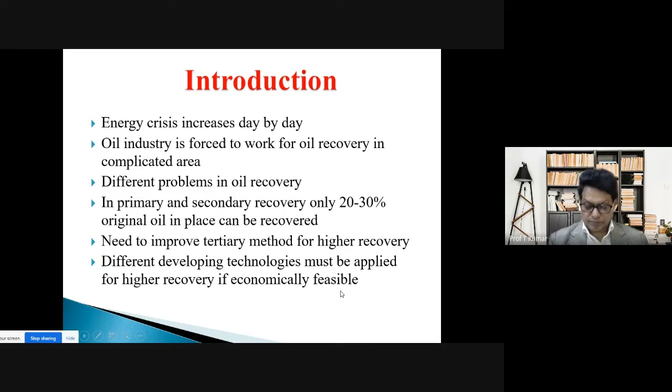Now, before we proceed to those, let's come back to this energy concept. What is the requirement of energy for our citizens? Ensuring lifeline energy to all its citizens at all times and at an affordable cost, leading to energy independence, is termed energy security. Now, in order to achieve energy security, multi-pronged action is required.

Some of the actions are direct, for example, use of the least energy to provide services with the available sources of energy. As a matter of practice, we should put effort into cutting any energy losses that happen in the entire energy chain system.

The third concept is that you don't really have to concentrate only on the major sources of energy. As a comprehensive approach, we should try to secure access to all forms of energy, no matter whether it is small or big. For example, bioenergy, or rural energy sources, bio-waste energy. These may be small sources, like biogas.

So energy security has become an important issue for a developing country like India. The strategic goals for energy independence by 2030 would thus call for a shift in the structure of energy sources from fossil fuel to renewable energy sources.

So stabilization is one aspect, done by the separation system, and then if any emulsion is there, using a heater-treater. The ultimate aim is to clear the oil of undesirable material through pre-processing until it is acceptable to the refining people. You store it and pump it to the refinery. Any excess gas that is not commercially usable could also be flared, called technical flaring, allowed only to a very limited extent these days. Eventually, this forms the complete system of the oil industry's operation for oil processing.

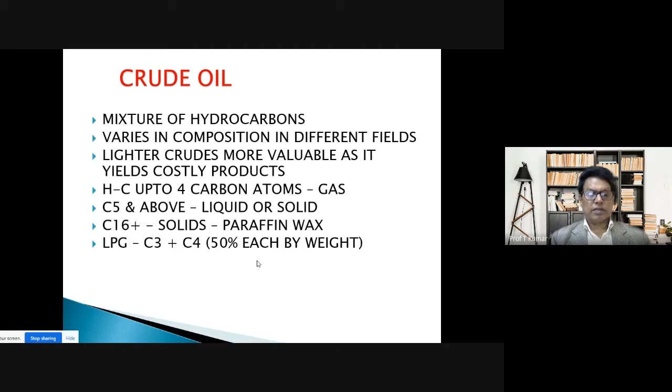Propane and butane, 50% each by weight, is known as liquefied petroleum gas, and we are all familiar with the household product LPG. Without that, our life is very difficult in the kitchen.

If you see the composition of a typical crude oil and gas, we have shown them separately. Crude oil composition is expressed in terms of percentage of carbon, 84 to 87%, which can vary plus or minus 10%. Hydrogen is 11 to 15%, sulfur 0.1 to 3.5%, these are called impurities. Nitrogen and oxygen are also present as impurities at 0.1 to 0.5%.

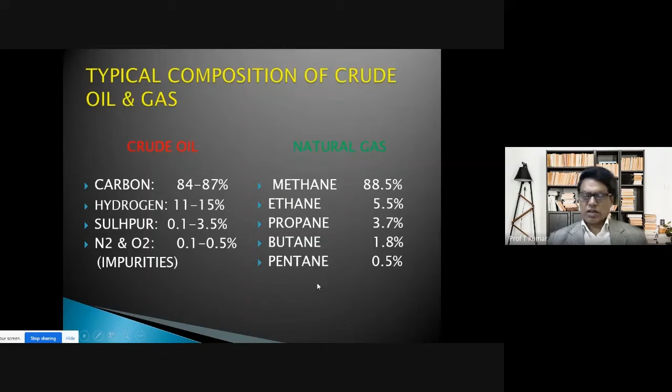Natural gas composition is expressed in terms of methane, ethane, and propane proportions. Methane content is very high, anything above 85-86%, shown here as about 88%. Ethane is in the range of 5.5%, plus or minus 10%. Propane is about 3.7%, butane 1.8%, and these two components go on to form the LPG composition. Pentane is about 0.5%, slightly less, and this is not a gas but a vapor generally present in natural gas.

So, what products are we familiar with from crude oil? There are two types of crude oils from the base point of view. On distillation, the residue is examined, and if it is primarily paraffin based, it is called paraffin-based crude; if the residue is asphaltene based, it is known as asphaltene-based crude, and it can also be a mixed base.

So typically in a refinery process, the first process is fractional distillation, which we already know from school days. It will yield petrol, diesel, kerosene, aviation gasoline, and fuel oil, which are heavier products—heavy oil, lube oil, wax, bitumen—all kinds of solid to gas to liquid to solid products which are sellable. By selling them, you make revenue and profit.

Whereas from natural gas also, valuable products are produced for selling, and this LPG we already talked about. Then from methane, we also produce fertilizer, particularly urea, and some petrochemicals like adhesives, which we use for day-to-day purposes, domestic as well as commercial. The furniture industry uses a lot of adhesives in commercial quantities, whereas at home we use small tubes of adhesive.

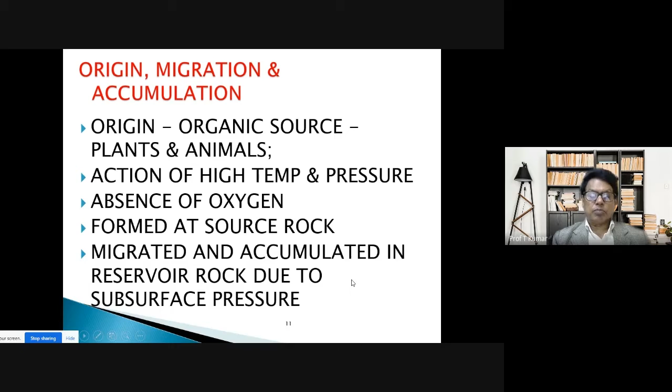Now, these micron sizes—to put it in common sense terms—you can think of a person's hair, man's or woman's. Hair thickness is a good example; the pore size will be of micron size, but typically the size could be similar to hair thickness.

And the hair is also of capillary type, not solid. So inside the hair, imagine there would be a hole. So that is the kind of range of capillary sizes in which oil and gas could be found. It's a very interesting challenge to petroleum engineers to locate this oil and produce it from the network of capillaries.

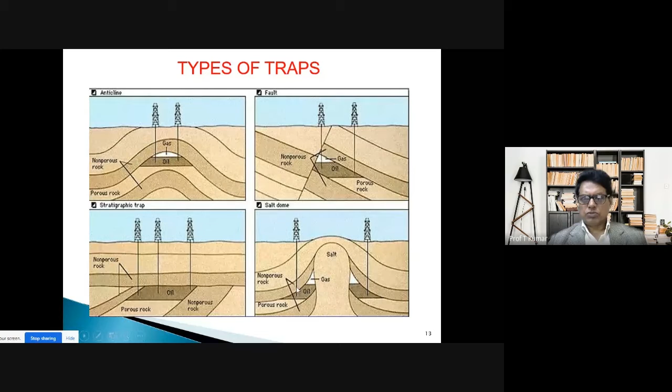Now again, people commonly talk about upstream and downstream - what is it, and is there a midstream also? Well, initially when the industry was formed, there was no concept like midstream. The company used to explore and produce oil and gas, and then sell it to refineries.

So the entire job of making it ready for selling was done by upstream industries, including transportation if needed, or it was a partnership between the receiving organization like refineries or petrochemical industries who would buy your oil or gas. But these days, because the industry has expanded so much, transportation and pre-processing and extraction of valuable products have become very big businesses.

This is particularly true when it involves a larger context - many continents are involved, many countries help us get gas mostly, and oil can also come from neighboring countries. So when that business is so large that exploration companies are not burdened with supplying these to refineries directly,

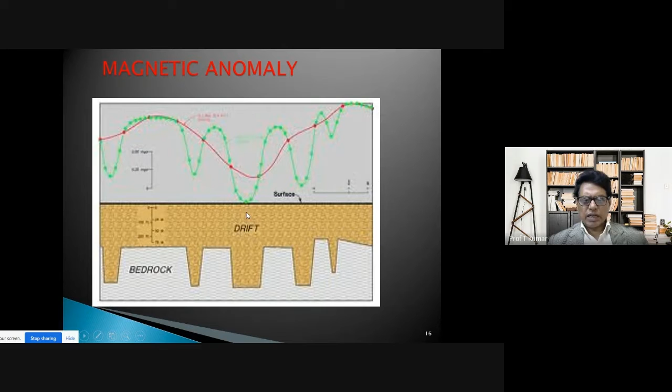This is an example of magnetic anomaly where it is lab data only. You can see the two types of rocks, and if you take the average vertically or volume-wise, it will have a reflection at the surface of the magnetic property, provided one of the two beds has magnetic property like iron ore or something like that.

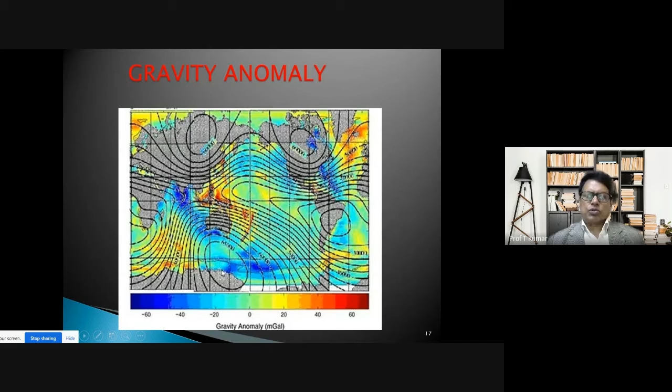But gravity is a very common thing. The acceleration due to gravity, from school days we studied as g, varies from place to place because the force of attraction toward the center of Earth depends on the total mass of the rock, which has varying density. So the resultant effect on the value of g will be different at different places. You go to the Himalayas, it will be different. You go to any plains, it will be different. So it depends on the total density of the rock below, up to which you want to see. This is another property which is used simultaneously.

Okay, these are only backgrounds. There is no objective here to teach geophysical methods.

And if it is all successful, we say we have got a discovery. So we declare it as a discovery of the property.

After that, a more systematic approach is done to drill more wells in the whole property so that the production in the long run becomes commercial. This activity is known as development. So you have appraisal and commercial production during this stage, and it expands in a more systematic, scientific manner in the development of the field, creating all kinds of infrastructure, not only wells but also pipelines, a network of pipelines. And I gave you one slide where the entire surface facility like separator, heater treater, treatment facilities, sand treatment, and fines treatment exists. Ultimately you have to have clean oil and gas going out. Even gas is also treated to some extent.

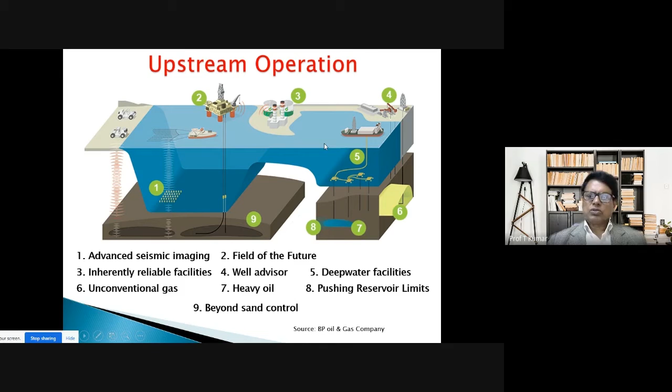Management and information: how to manage the whole operation, because it is a commercial venture, not a scientific experiment in the field. The ultimate objective is to produce the mineral property, oil and gas in our case, and profitably. The flow of information should be such that managing this entire exploration, production and processing industry has minimum expenditure and maximum profit.

Increasing the production of liquid fuels is another kind of decision, because it is a mixture of hydrocarbon that also contains gas in dissolved and free form. As a reservoir engineer, the job is to plan the whole thing so that production is optimized in terms of maximum liquid production. If you sell oil and gas and some gas remains dissolved in oil sold as oil, that is profitable. But if liquid vapor goes into gas and is sold in gas form, you lose valuable revenue, because that vapor, if produced as liquid, would have fetched more money. These are the optimization problems, a very good engineering approach petroleum engineers use.

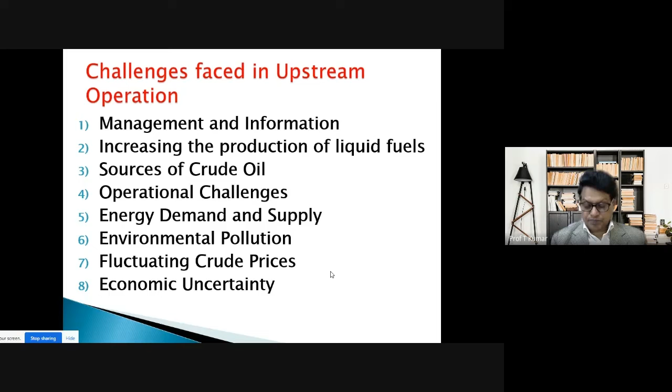So you have to conquer water before going below sea level to find oil and gas. Conquering water means for exploration, production, transportation, maintenance, and the logistics service system. The entire chain of oilfield operation will be influenced by whether water depth is more or less. If it's nearer the shore, a structure like a platform could be anchored nicely, or it can sometimes be a jack-up platform. There are also semi-submersibles and ships. So the cost of operation per barrel of oil is much higher if you have to handle exploration and production offshore with more water depth.

I used to summarize the whole thing in two words. This challenge will be called the challenge of water depth. More water depth means more challenge to conquer that water for any operation.

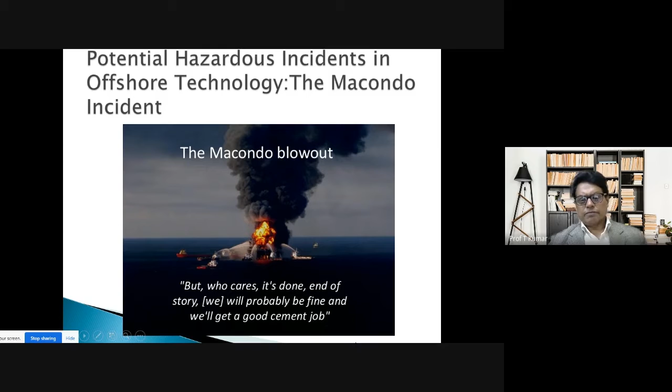And then hazards, which are sometimes very, very deadly. An example is a blowout - you hear about blowouts sometimes. Whether offshore or onshore, a blowout can cause devastating effects, not only burning entire platforms, but if there's no time given before the emergency occurs, people's lives are also endangered. This has happened many times. One such example is the Macondo incident where a blowout occurred. There are many other examples, but the purpose is not to show many of them.

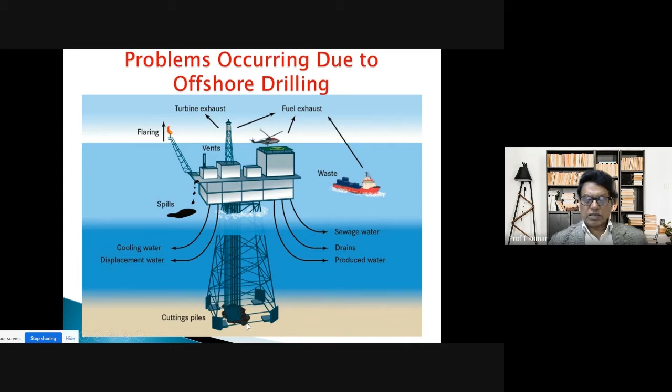In offshore drilling, there are problems related to the drilling structure and drilling platform. You can see that space is the biggest constraint - from one platform, you have to drill many wells. The source of water available is all seawater. People living there have to sustain a high cost of living, and transportation is also only through helicopters. You can't think of traveling by ship - it would take one month to travel 100 or 200 kilometers. So the cost of offshore drilling operations, besides operational hazards and operational expertise like the number of wells drilled through a single operation, and piling operations to make wells stable - all these are shown in this diagram.

In summary, the problems occurring due to offshore drilling are that the environment around the drilling site is bombarded by toxic chemicals and threatened by accidental leaks and spills. Primary environmental concerns associated with drilling sites are drilling waste, muds, cuttings, drilling fluids, produced water, accidental leaks, blowouts, and accidental or intentional spills. Drilling waste such as drilling muds, if thrown into the sea, cuttings, or onshore as well, and produced water contain both abundant and diverse contaminants. These are basically offshore operations, but some of them are also common onshore. So environmental challenges and meeting them as per environmental regulations is an additional challenge.

These risks include wildlife developmental defects, shortened lifespan, and physiological challenges. The life that exists in the sea should not be adversely affected. The potential for accidental or routine release of drilling wastes can occur through containment failure, runoff, or direct discharge. Many of the toxic chemicals associated with oil and gas drilling are known to accumulate and magnify in the food chain. This poses a risk to aquatic organisms higher in the food chain, such as fish and birds. Natural gas and oil leaks and spills can have extremely negative effects on the natural environment, both onshore and offshore.

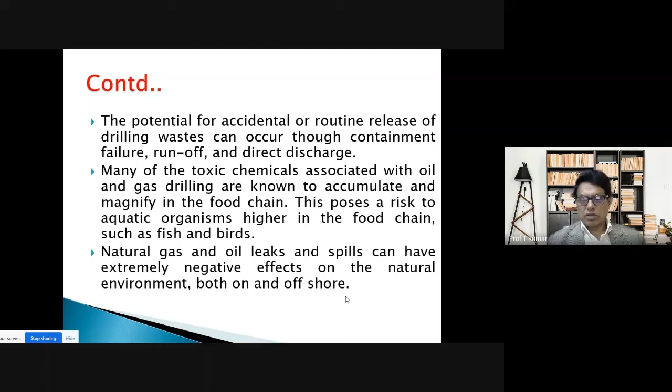Drilling fluid management on the site has certain responsibilities like proper mud mixing, mud circulation and transfer, bulk storage and transportation, solid control, high pressure manifolds and well control, cuttings re-injection and systems.

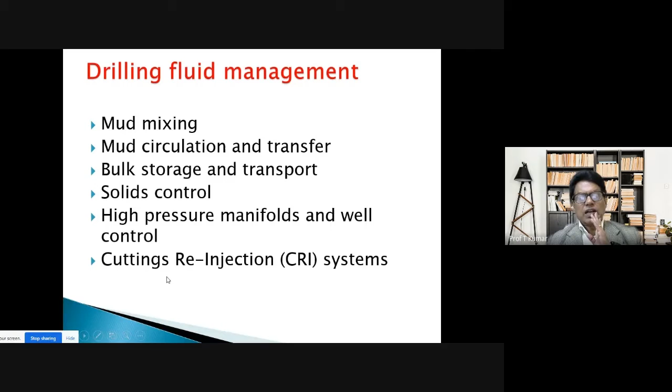Environmental Protection Agency studies show that routine discharge of any drilling mud can adversely impact bottom-dwelling species. These impacts range from burial of species to disruption of basic life such as reproduction, eating patterns, and lifespan. Toxic discharges from drilling mud may also lead to acute or immediate evident effects in some representative marine species such

as scallop, lobster, and a variety of fish. This is only an example. So these are the drilling operations that have been shown here.

Now, drilling challenges are just named here, we are not discussing much on drilling. These are percussion or cable tool, rotary drilling, hole cleaning by mud, incline or horizontal wells, use of turbo dyna drills, drag, cone or diamond bits, temperature, pressure and water depths, and drilling for presence of hydrocarbon. Depending on the type of rock, we have three different types of drill bits: for hard rocks, for medium hard, and for soft rocks, drag bits.

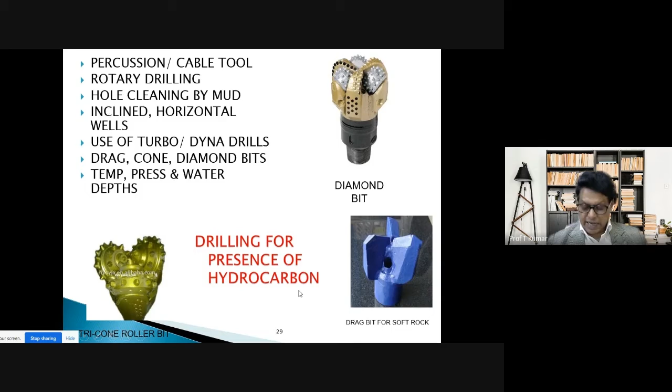In offshore drilling, of course, these are the structures we are having. Platforms like jackup, semi-submersible, drill ships, three different types.

Challenges are water depth, hostile environment, current, wave, and these are the corrosion problems. And the wind, wind can also have an effect.

Dynamic positioning of vessels, which are ship type, has to be maintained while you're drilling or doing other operations. This requires a special type of vessel. And logistics, of course, transportation of the men and material.

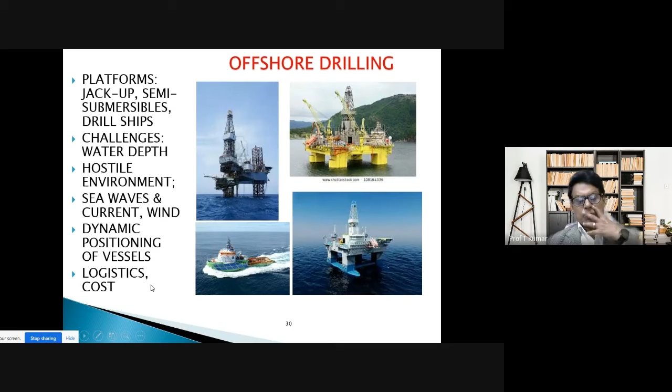Artificial lift, pumping wells like SRP, ESP, hydraulic, gas lift, plunger, chamber, EOR, IOR, water, polymer, surfactant, caustic, thermal. So these are a combination of all that at different stages of life.

These are there. Like here, sucker rod pumping example has been shown, ESP has been shown, polymer flooding in enhanced oil recovery has been shown, involving two wells, production well, injection well, and any chemical EOR where surfactant, polymer, or any alkaline or foam or these are used.

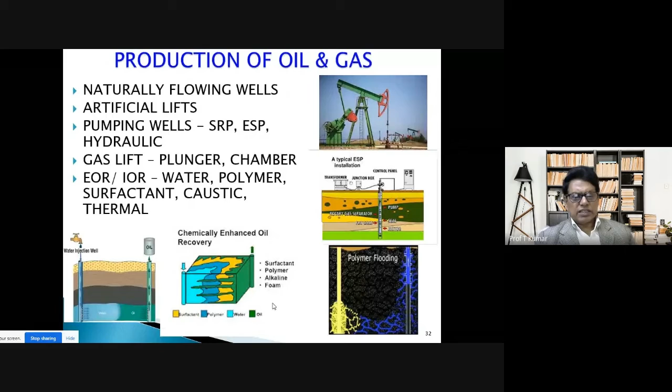So this is a typical water injection. So that part we have finished as far as production is concerned.

Then some associated sources are there. For example, people say, what will happen after 50 years? Will all oil and gas be exhausted? What will happen to our young engineers? People say, okay, you have to switch over from conventional sources of oil and gas reservoirs to unconventional sources of oil. One of the most important unconventional sources of gas is known as natural gas hydrate.

Natural gas hydrate was known for ages. In fact, it was known from the time the oil industry started, because hydrates used to cause problems in the gas pipeline when the pipeline faced low temperatures, particularly minus temperatures. Part of the gas pipeline used to get choked. So that was a nuisance.

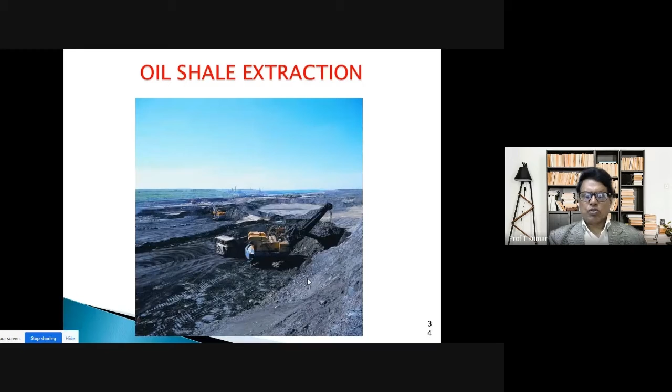Another source of energy yet to be tapped fully is found to some extent in certain parts of the world, particularly in Canada. It has been found that oil sand has actually been mined. So it's not impossible, you could mine it, and the solid hydrocarbon, which cannot be produced by conventional approach, can then be extracted in a large scale retort. So by retort, you could now extract it.

So mankind has been able to do all kinds of things which will ultimately make the energy available to you. And very common already in practice now is what is known as shale gas.

Shale gas will mean gas contained in shale rock. Shale rock is also considered to be the source rock in which the hydrocarbon was originally deposited, but because of the low porosity and permeability, it did not travel a long distance. So it got trapped, and with time, natural fractures also developed because of the way the entire shale material got consolidated later on.

There is an in situ stress change that has happened - the geologists will tell you more. The stress changes took place over millions of years while consolidating the rock, with a change in pressure and temperature. It developed the natural fractures.

So they say that in the natural fractures, in the crevices, in the pores, the gases are there. The pores are there, it is porous material. This shale rock was originally formed from fines or fine sands, much finer than sandstone sand size.

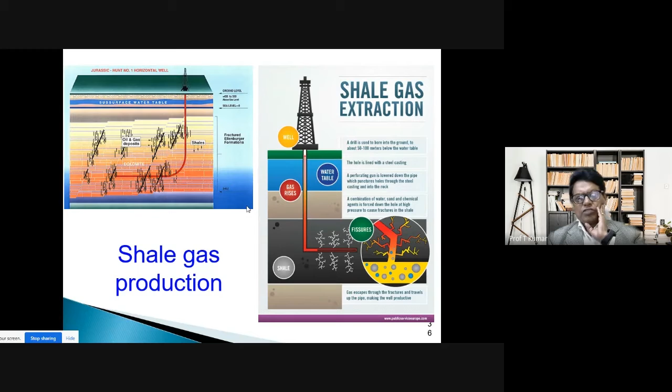it is a very important source of energy supply in the United States. And in India, of course, we are not in a very mature stage, but we are in an initial stage. Some places the work has started.

So this is sand material and shale material with oil - slightly different, but operationally it is non-movable hydrocarbon oil, heavy oil, viscous oil contained either in the sand or in the shale form.

So these are the unconventional sources of hydrocarbon. For now, there is only limited extraction going on, but in future, wherever such types of deposits will be there, it may become a good source of hydrocarbon for people.

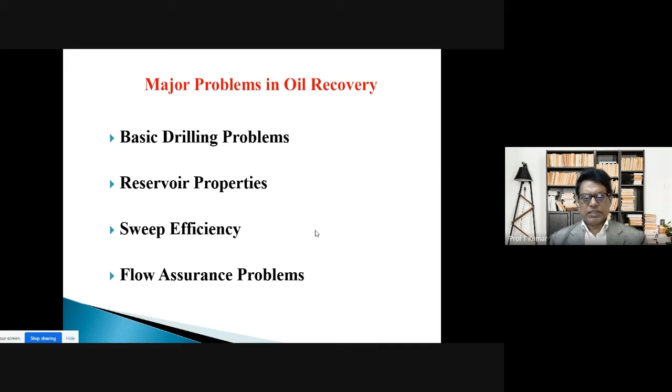So I have now quickly gone into more operational aspects, and I divided it into basic drilling problems, reservoir properties, sweep efficiencies, and flow assurance problems. This will highlight things more operationally.

So flow assurance, a word you have heard, is of recent origin, last 15-20 years. Initially, people thought of individual problems, but basically, oil and gas wells, when producing, should be producing without any hindrance. That's why it is known as flow assurance - you give assurance to remove hindrance of production into the wellbore.

This hindrance can be of many types. It can be corrosion products, it can be paraffin, it can be wax of any type, and it can be scales - maybe solid deposited around the wellbore. So all kinds of formation damage related problems, and the well tubing problem - the tubing getting choked - all that together we can call the flow assurance subject. So you have to solve this problem.

So wax, asphaltene, inorganic scale, sand, or a mixture of these. Sudden formation of hydrate in a gas well can also be part of it due to low temperature. As I was telling, in the initial stages of the industry this was a major problem, and now they have resolved that. Lack of reservoir pressure required to move hydrocarbon to the receiving facilities. Increased pressure drop caused by high viscosity emulsions, so emulsion problems between oil and water. If it is enormous in the well itself, then this is also part of flow assurance. Restart difficulties due to heavy and viscous oils. Corrosion problem due to presence of acidic environment and hydrogen sulfide.

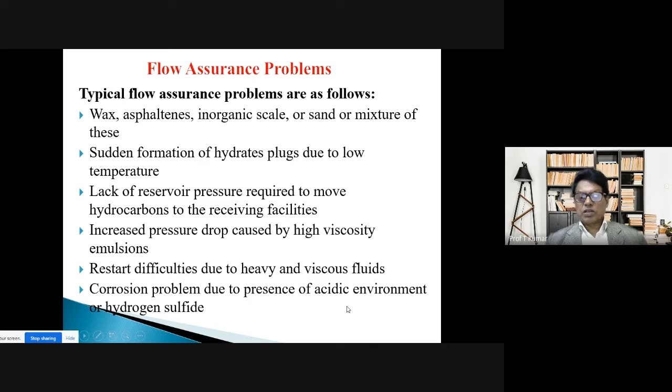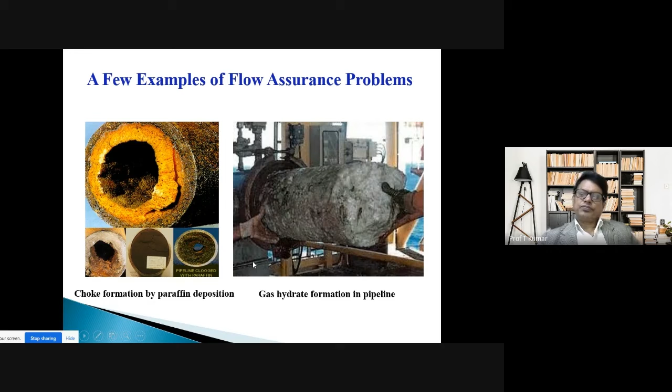So according to the problem that exists in a given situation, the solutions also have been formed. General solutions for flow assurance are: regular injection of chemical inhibitors or solvents, regular launch of pigs or displacement through pipeline, injection of hydrate inhibitors, appropriate selection of pipeline diameter or flow control valves or chemical products, usage of emulsion breakers, sand control or regular pigging operation, use of pour point depressants. So in a research subject, you could take up one or two problems and try to find the solution of a given problem. Optimum thermal insulation or active heating, use of corrosion inhibitors, pigging or internal coating. So these are the possible solutions.

Now coming back to one stage, we said a substantial amount of oil and gas has to be recovered. It's not only enhanced oil recovery, enhanced gas recovery is also possible. For example, if you have CBM gas or even natural gas, a substantial amount of gas may remain after the pressure has depleted, and then you could try enhanced gas recovery. So typically we say enhanced oil recovery, but enhanced oil and gas recovery would be a better term.

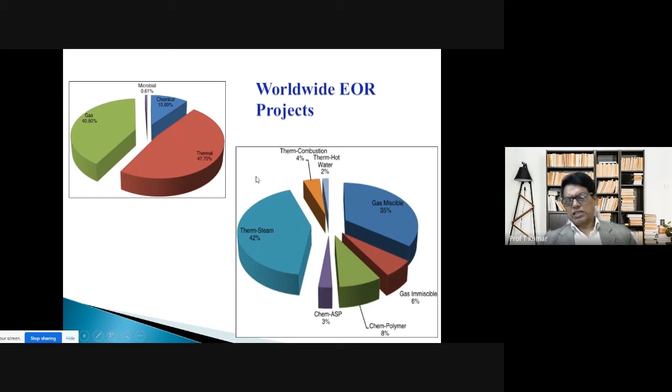This is another diagram which shows slightly more detail. For example, in the chemical method, ASP, alkaline surfactant polymer flooding, is a very complex chemical flooding, with a small percentage because of economics. Only polymer flooding, which is more popular, is at 8%. Gas immiscible flooding, where the front is not miscible, is about 6%. Gas miscible flooding is more popular, and out of that, CO2 or hydrocarbon gas, enriched gas, for example, accounts for a substantial number of running projects. In the thermal method, steam is the most popular method all over the world, but there are hot water projects at a small percentage, and there is also the in situ combustion method, which is running in some places.

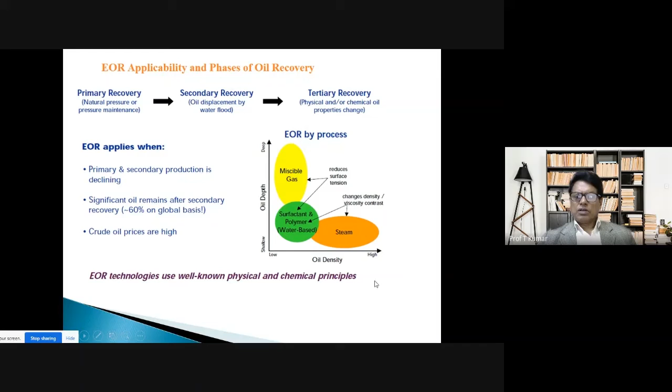So for general understanding, this is not an exhaustive screening criteria, but just to give you a basic understanding: if you look at depth here from shallow to deep upwards, and the x-axis is oil density, a low density means light oil occurring at relatively shallow depth, shown by this green circle where surfactant polymer has been more popular. But there is also overlap; it's not that polymer cannot be used in a slightly deeper well, this is just statistical data. Similarly, if you have high density with high viscosity, the steam method has been very popular. And miscible gas, because of the miscibility of the gas for miscible flooding, finds more suitability in deeper formations. So this overlaps also to some extent.

Now just the names of the methods used in enhanced oil recovery and where each applies: the alkali method, surfactant method, polymer method, and alkali surfactant polymer, or simply ASP - a synergistic method. Each method has its own advantage and economic success potential.

Surfactant is very expensive, so wherever you use surfactant, although it assures complete miscibility and you get microscopic displacement at a very high percentage, it has to be used judiciously. Its slug has to be designed properly so you don't use an oversized slug, or undersized, otherwise the issue of slug integrity will arise.

Alkali is known to reduce interfacial tension and controls both pH and salinity. So all three parameters can be taken care of simultaneously if you are using alkali. Wettability alteration is also achieved - if the reservoir is oil wet, alkali can help convert it to water wet.

There's another dimension here: many alkalis, as shown in lab work, form in-situ surfactants. So the benefit of surfactant can be obtained simply by injecting alkali - when it reacts with oil, it forms surfactant. These are the multiple advantages people ask about when questioning why alkali is used.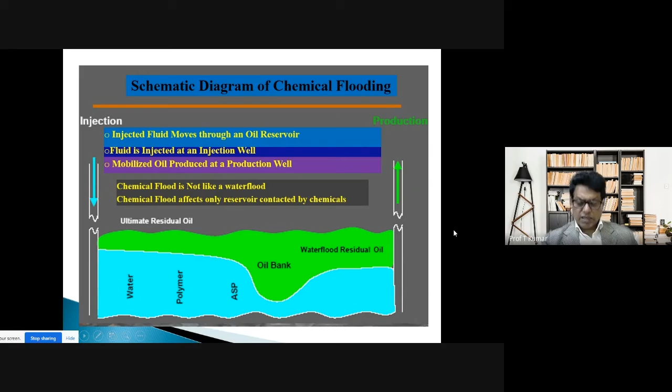Those are part of the design, and ultimately you produce and process at the surface. This is a bigger design, again from the website and from the text - one conventional example where micellar polymer has been used. A micellar solution or micro emulsion can be used in place of the micellar solution.

So here you have a pre-flush to condition the reservoir, followed by the prepared slug, followed by a polymer slug for mobility correction, followed again by a buffer - they call it water and polymer in between - which protects the polymer, and followed by a large chase fluid so that the entire slug moves gradually towards the production well.

This diagram is good because it's a 3-dimensional cut view and you can easily see 5 wells - one here, one here, one here, one here - so 4 injection wells and 1 production well. ASP has been shown - excellent view. For those seeing it for the first time, this diagram explains how the 5-spot pattern works, with fluid coming from all 4 injection wells in a circular fashion towards the center.

Our job as engineers is to ensure it is not prematurely breaking through - the injected fluid behind should not get fingered. The challenge is always that the slug you prepare moves as a smooth front, not breaking through into the fluid ahead of it. Any slug should not break through into another slug, as that would cause loss of integrity and loss of efficiency. So this looks fine as a diagram, but the design, maintenance, and volume calculations are the real challenges.

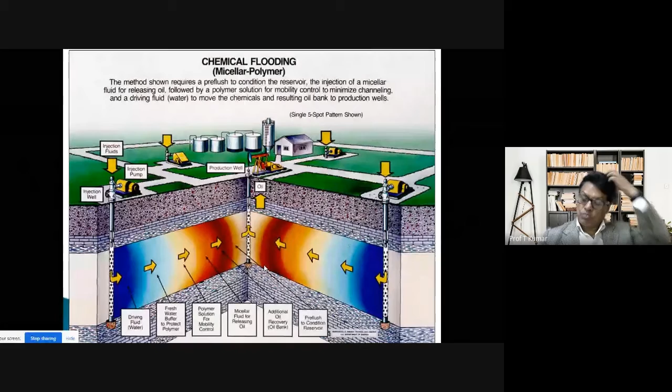When it comes to thermal method, heat applied to crude is the basic thing. It is a heat method, in fact. We are applying heat in some means, that is called thermal method.

So the primary application of thermal method is that it reduces viscosity. Viscosity of the heavy oil having high viscosity is the target of this heat application. It activates solution gas drive locally, because gas is also formed, and steam condenses into water sometimes as it is moving. Thermally, oil will also expand when heat comes in contact, increasing permeability of the oil zone. It can also create distillation or even thermally crack the oil.

Cyclic steam drive heats oil locally around the wellbore to stimulate production. In cyclic steam, a single well is involved. When you drive from injection well to production well, it is known as steam drive. Hot steam is injected in one well and oil is displaced in the surrounding producing well. The example is a 5-spot pattern.

Another variant of thermal method is known as in situ combustion, in which combustion of oil is initiated in the formation. That means we burn part of the oil. In order to sustain that ignited oil, air is pumped into the reservoir to allow ignition. Heat and gas generate reservoir pressure and decrease viscosity by heating and cracking.

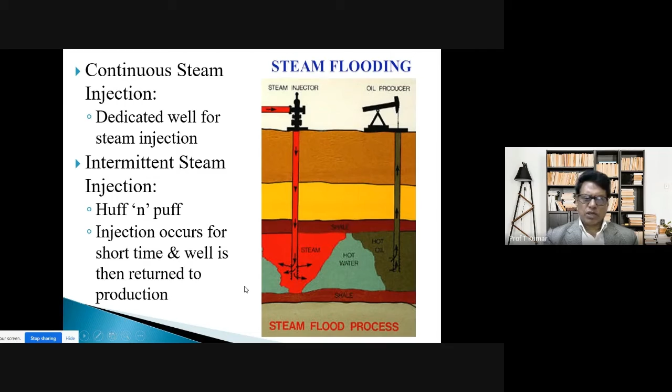Another variant of flooding is known as carbon dioxide flooding, which is now getting popularity globally. In India also we have many projects because it has been found to be very, very efficient. Typically in this diagram, you can see CO2 is getting injected here and it forms a miscible zone, and in front of that an oil bank which is mobilized, and there is cold oil. So this entire thing is moving, and the front is miscible, and therefore microscopic efficiency is considered to be very high. There are conditions attached with that.

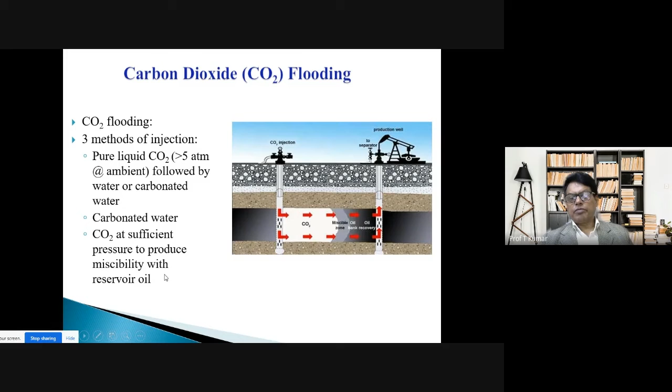Three methods of injection are there: pure liquid CO2 in liquid form at more than 5 atmosphere, followed by water; and carbonated water, where CO2 at sufficient pressure is used to produce miscibility with reservoir oil. So miscibility is one of the aims, and pressure is a critical parameter in this.

Another EOR method is known as microbial EOR. This is also gaining importance. Some of the microbes are very favorable in this process. So MEOR is a technology using microorganisms to facilitate, increase or extend oil production from a reservoir.

Excuse me for a few seconds, let me take some water. I think I would like to take a 2-3 minute break. Just hold on, I'll come back. Is that okay? Yes, sir. Sure, sir. Okay, sir, 2-3 minutes.

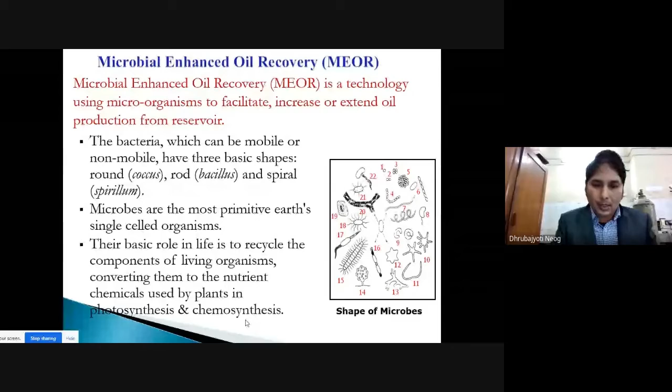Okay, I'm back. So just a couple of minutes on this. The bacteria - should I continue? Yes, sir, please. The bacteria, which can be mobile or non-mobile, have three basic shapes.

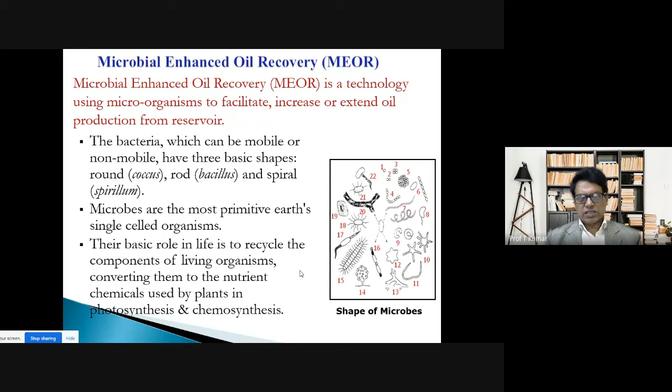It can be round, rod-like, or spiral type. Some of the diagrams on the right side show a variety of shapes. So any shape bacteria can take. These microbes are the most primitive earth's single-celled organisms, and their basic role in life is to recycle the components of living organisms, converting them to nutrient chemicals used by plants in photosynthesis and chemosynthesis. That is the definition.

This method has also been popular in India. This slide is slightly older, but it doesn't matter - it refers to a polymer flood. I was telling you about some projects, polymer flood in Oil India, ONGC, as well as Cairn - they have some projects running on polymer flood. This is the Sanand polymer flood.

Some old data is there. Because of mobility contrast and low primary recovery, it was decided to go for polymer flooding. Production increased from 100 meter cube per day to 400 meter cube per day, and water cut was reduced from 88 to 68%, remaining constant until the report, for 6 years. It was a very effective polymer for a successful polymer flood. That's why I have not removed this, and the project is still continuing and may continue for a longer period.

Similarly, as I said, Cairn also has some project, much of whose data I have not given - that's not immediately the objective here. Other projects, ASP projects, are also running.

In the lab, work can be done. Those of you who have interest in research can see what kind of apparatus is required. So you will require some flooding setup.

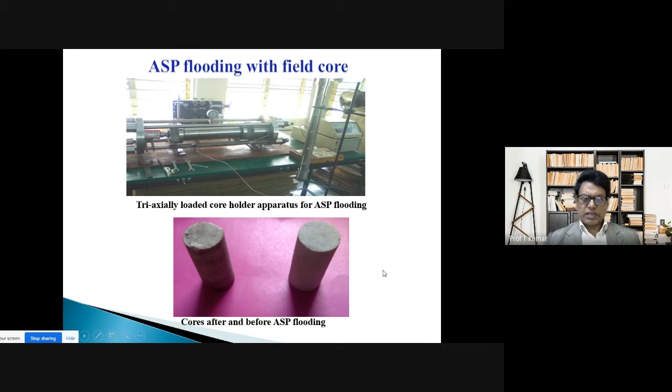In future, nanotechnology in all aspects has been tried. Electromagnetic heating, improved methods, efficient chemical synthesis for chemical flooding, smart surface active polymer for improving viscous force and reducing capillary force. So these are the basic mechanisms by which future technologies have got backup. For example, nanotechnology is already in use today.

This diagram I will skip as it is only giving some background. Structure of oil and gas industry - those of you who are interested, since you are in India, most of you are knowing it, but students may not have much idea. Industries are exclusively in upstream or downstream, or sometimes midstream. These industries, by name, I have given some of them: ONGC, Oil India, Cairn, Reliance. They are coming under private companies. So these companies are there under exploration and production for upstream.

Whereas in downstream, mostly refining, petrochemical, or distribution, etc. And then some of the distribution companies like GAIL, etc. have come under midstream now because they are handling gas transportation. HPCL, BPCL, IOCL, RIL, etc. have refineries and marketing.

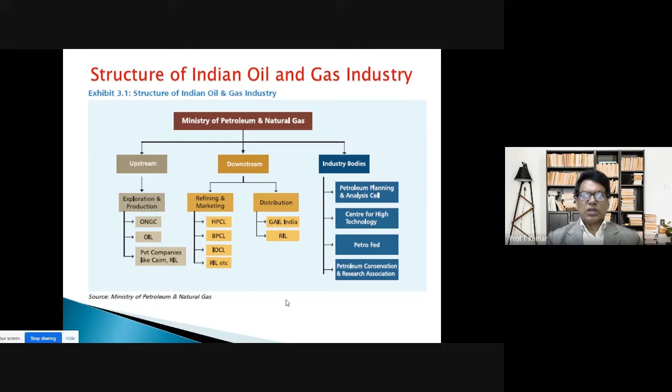Similarly, certain regulatory bodies are also there. There are many more, but the Petroleum Planning and Analysis Cell prepares long-term plans; Center for High Technology, PetroFed, Petroleum Conservation and Research, where energy audit is done. Similarly, for safety purposes, you have DGMS, and for regulatory purposes, you have DGH and OISD, etc. On the Ministry of Petroleum and Natural Gas site, details are available on their individual contributions and activities.

Process safety performance risk assessment is one other thing which is also important: plant and process change, functioning of safety critical equipment, competency and training. Unless people are trained regularly, their expertise cannot be utilized to the maximum. So up-to-date, latest technologies which are actually prevailing in the industry should be updated to the large manpower.

So training is a built-in process. We are the academic trainers, but in-house training is also important, where their activities are showcased in the classroom, and the workers and officers are trained suitably to handle the latest technology used in that company. That's why we are saying the importance of competency and training.

Resources can be financial, staff, or equipment. So latest equipment should be there, trained staff should be there, and you should have financial assurance so that business can run. The procedures have to be thoroughly understood. Plant inspection and maintenance is part of the ongoing assurance of long-term business, so sudden failure will be prevented if you have a proper inspection and maintenance plan. If you don't have one and you are waiting for the breakdown, people call that breakdown maintenance. So you don't go for breakdown maintenance, you should have preventive maintenance.

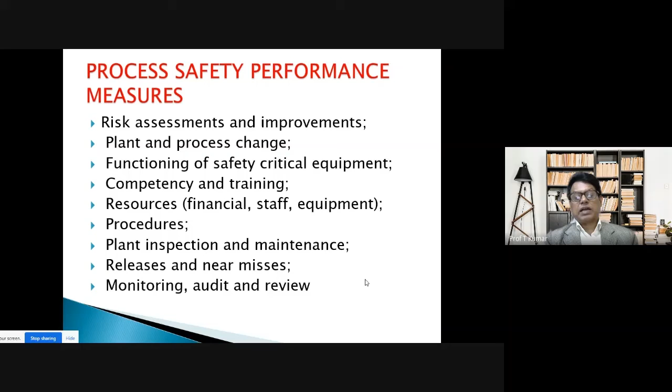Coming back to natural gas availability, which I have not talked about so far, and oil availability. Natural gas that comes from crude oil wells is typically called associated gas because it is associated with crude oil. Natural gas processing plants purify raw natural gas from underground gas fields and wellheads by removing common contaminants such as water, carbon dioxide, and hydrogen sulfide. Processing of raw natural gas yields byproducts: sulfur, ethane, condensate, propane, butane, and pentane. These are separately sold—it's called a value addition technique.

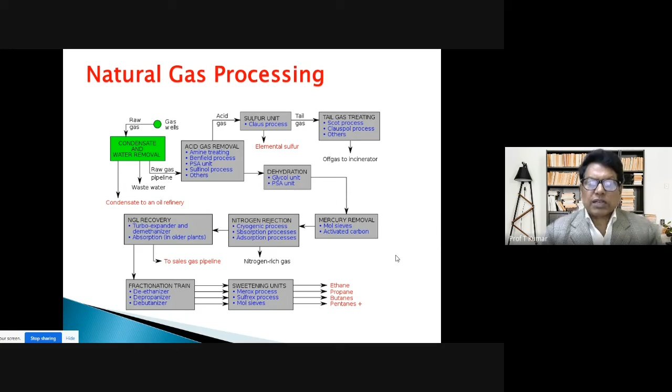Natural gas liquid, if recovered, is a value addition. So if you remove those vapors and convert them to liquid, you can sell it as petrol. But if it goes as is and is burned, you're wasting it. So this serves two purposes: one is treating it, making it suitable for use by the downstream industry or consumer; second is value addition, so some valuable products can be taken out. Sulfur removal also means a double thing—one is treatment, second is sulfur itself can be reused somewhere. Mercury removal is a safety measure, and these sweetening processes remove sulfur components, SO2 and H2S. So treatment is a two-pronged action: making it ready for the consumer, and extracting valuable products before selling the natural gas.

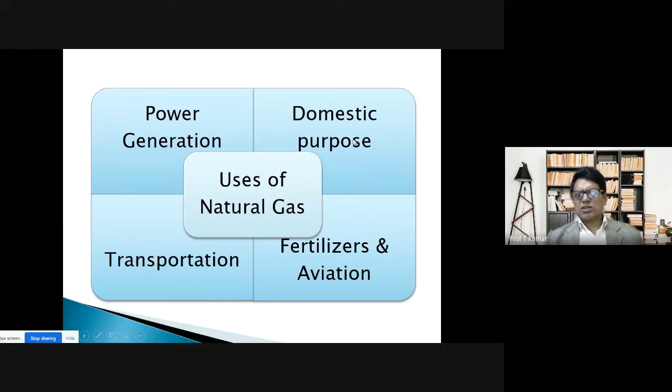Then CBM is another form of gas, mostly methane. This is an attractive prospect for development because of its ability to retain large amounts of gas. Coal is able to store 6 to 7 times more gas than the equivalent volume of rock common to conventional gas reservoirs, because the coal surface has the advantage of adsorption. That is giving that advantage. Coal bed methane or coal mine methane is also known by this name.

Free gas, known as coal mine methane, is a form of natural gas extracted from coal beds. The methane entrapped in coal cleats in deep or unmineable coal seams is termed coal bed methane. Usually under regulation today, below 600 or 700 meters, the coal bed is not being extracted for coal, and therefore permission is readily given for coal bed methane extraction, meaning methane extraction.

An added advantage is that since this gas involves greenhouse gas emissions, there's concentration through CO2 sequestration. Methane is also a greenhouse gas, but this methane is getting extracted and used for energy generation. CO2 can be used here as enhanced gas recovery, enhanced CBM recovery—CO2 can be sequestered, so every cubic meter of CBM can be replaced by that many cubic meters of CO2. So CO2 is getting sequestered, and in effect you are getting enhanced gas recovery, enhanced CBM recovery. This is another technique you can do at a later stage.

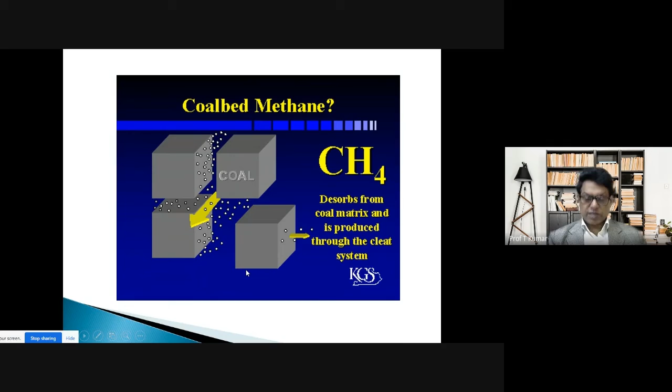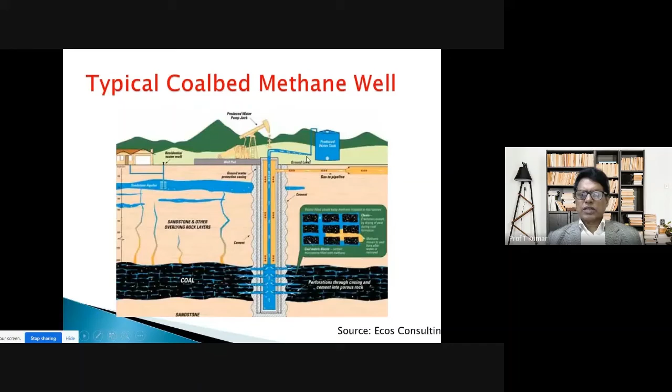So coal bed methane is basically found in the cleats, that system of the fractured coal. A typical well is shown here, which needs to be fractured like in shale gas, because around the well bore the permeability is very low. So in order for the gas contained as adsorbed gas, free gas, and dissolved gas in water to be released, the water is produced, and you offload this water using pumps—this water contains gas, which is then separated. That's the basic mechanism.

So what are the wastes that are generated in CBM extraction? It is the drilling mud, which is used for drilling. That has to be properly disposed of. Water-based drilling mud most commonly consists of bentonite clay, barium sulfate or barites, and calcium carbonate, chalk or hematite. So these materials cannot be disposed of just like that. It has to be properly disposed of so that it doesn't cause any environmental damage.

Drilling mud classification is based on dispersed system and non-dispersed system. Environmental issues, like we just said, in production or distribution of CBM can have severe impact on rural agricultural communities. So effluent cannot be disposed of in the agricultural fields.

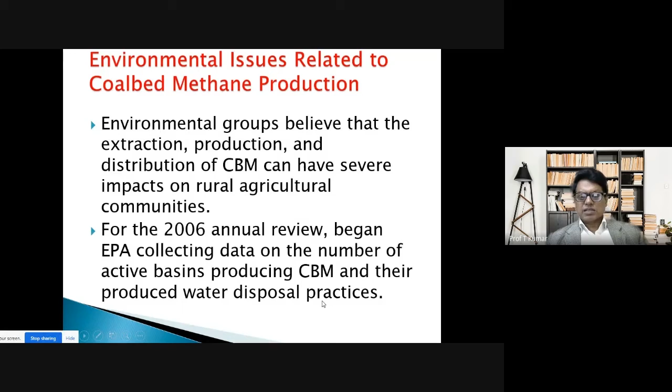In 2006, a review began with EPA collecting data on the number of active basins producing CBM and their produced water disposal practices. That is a separate subject of study, on how much damage it can cause and how to prevent that. So produced water disposal is an issue that needs to be addressed.

Produced water quality varies depending primarily upon geology of the coal formation. Typically, saltier water is produced from deeper coal formations. So that is a characteristic. Produced water may contain nitrate, nitrite, chlorides, salts, benzenes, toluenes, ethyl benzene, other minerals, metals, and high levels of total dissolved solids. This water can cause damage to the environment if disposed of improperly.

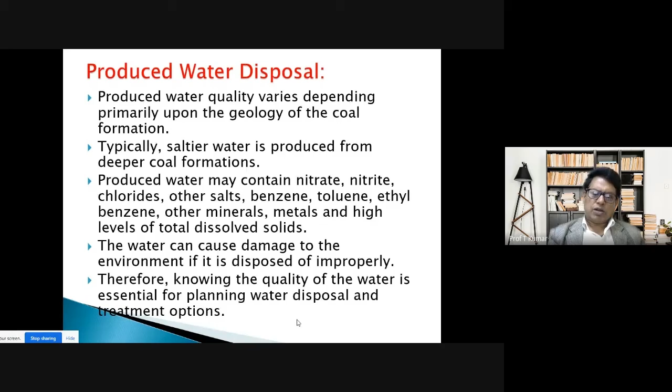In the Powder River basin, some examples are there. Several companies use the option of re-injecting the produced water into the sandstone aquifer. In an effort to put CBM produced water to beneficial use, Pennaco Energy is currently re-injecting CBM water into an aquifer. In the San Juan Basin, CBM produced water is typically disposed of by downhole injection. In the San Juan Basin of New Mexico and Colorado, disposal by deep well injection costs around $1.75 per barrel. This figure might have changed.

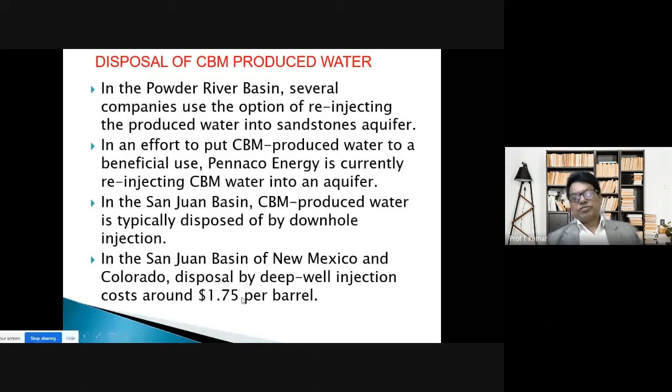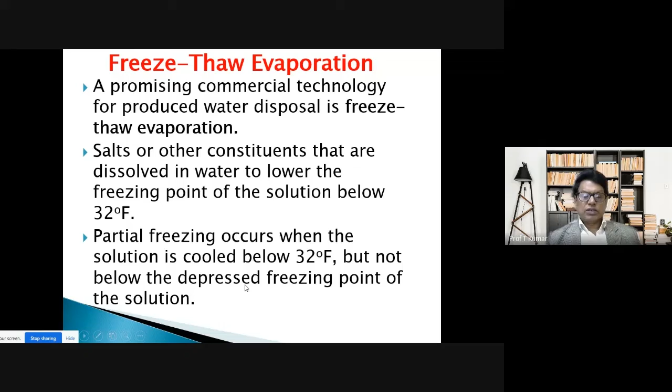Okay, freeze-thaw evaporation technique. A promising commercial technology for produced water disposal is freeze-thaw evaporation. Salts or other constituents dissolved in water lower the freezing point of the solution below 32 degrees. Partial freezing occurs when the solution is cooled below 32 degrees, but not below the depressed freezing point. So these are some of the techniques used for disposal.

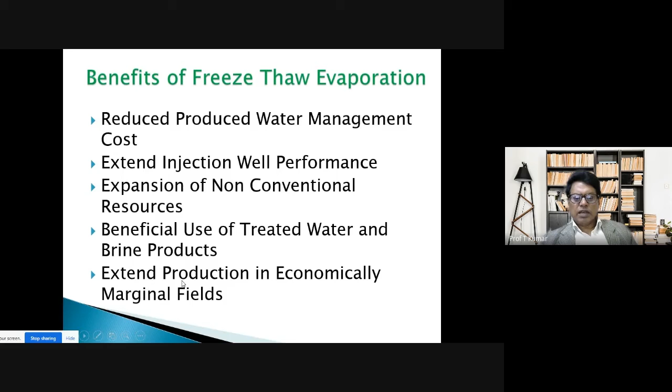So freeze-thaw evaporation method reduces produced water management cost, extends injection well performance, allows expansion of non-conventional resources, beneficial use of treated water and brine, and extends production in economically marginal fields.

There are limitations of FT. This technique doesn't require infrastructure or supplies that limit its use. The electricity required is standard, 40 to 80 kilowatt, and no chemicals are used. FT process requires climate with a substantial number of days with temperatures below freezing. FT process requires a significant amount of land, 35 acres for a 1,000 barrel facility. FT process requires proper hydrogeologic setting, including favorable soil conditions, locations of legal waters, and characteristics of near surface aquifers.

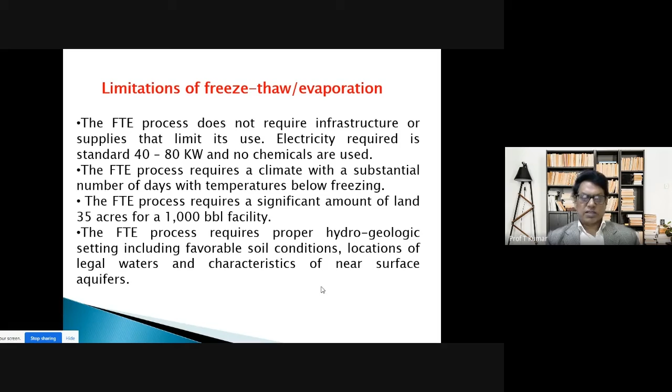There are other treatments also like aeration, reverse osmosis, sedimentation, chemical precipitation, thermal distillation, road spreading, surface discharge, etc.

Groundwater withdrawal is another technique. Two potential ancillary impacts of groundwater withdrawal resulting from CBM production are subsidence and coal seam fire. Because CBM production is associated with water production, as you might have noticed, for several years initially we have huge water production and its disposal. Disposal may be an issue, but the water that you have taken out might cause subsidence in that area ultimately, and it may also cause coal seam fire sometimes. This has been separately studied by many researchers, and papers are published and available in the literature.

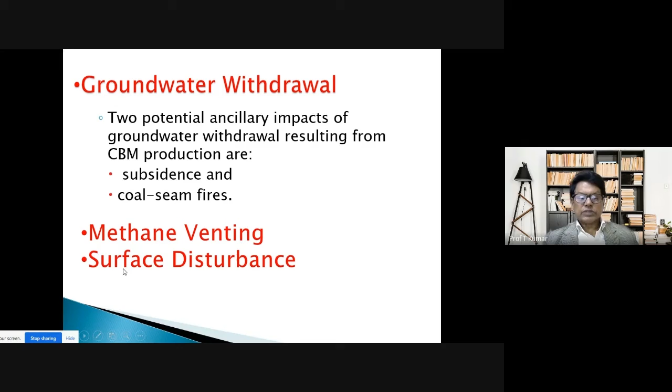ISM has done several projects on subsidence controlled by our Mining Environment Department. Methane venting, surface disturbance, all these are problems. Of course, uses are many. These uses are similar to natural gas uses, like transportation, CNG, ceramics, steel industry, power industry, fertilizer, cooking, research and development. In Dhanbad, it is now getting connected through CNG from Bokaro. So this is also one benefit, because we don't have a gas field nearby.

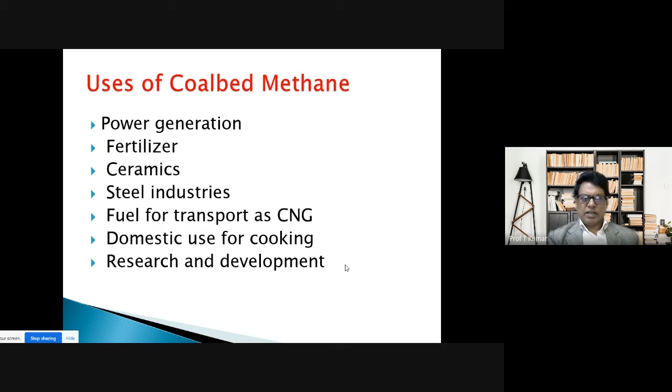Methods for coal-bed methane: primary recovery is reservoir pressure depletion and dewatering. Secondary or enhanced recovery involves pressure swing adsorption and desorption through gas injection. And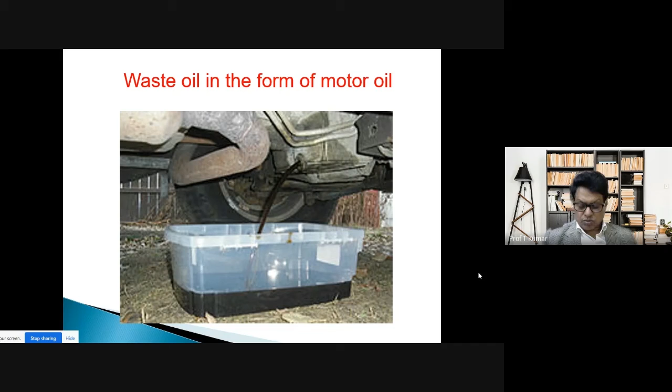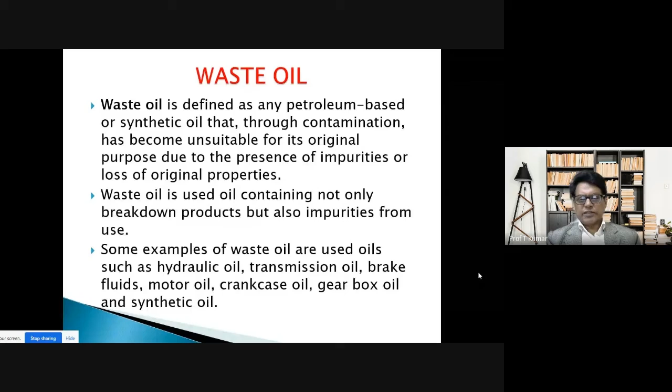That's a question. So these are called waste oil, defined as any petroleum-based or synthetic oil that through contamination has become unsuitable for its original purpose, because it no longer can be used in engines unless it is treated. That is also one way. Different types of engines or equipment use it as a lubricant sometimes, or coolant. Lubricant or coolant, both are purposes.

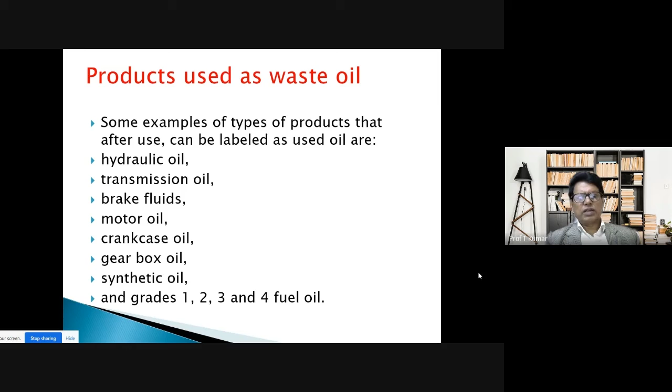Waste oil and used oil are loosely used terms. Used oil is defined as any petroleum or synthetic oil that has been used, resulting in contamination by physical or chemical properties. Waste oil is a more generic term, in any form, oil that has been contaminated with substances that may or may not be hazardous. Both used oil and waste oil require proper recycling or disposal to avoid environmental problems. Products used as hydraulic oil, transmission oil, brake oil, motor oil, crankcase oil, gearbox oil, synthetic oil, these are different grades, fuel oil, these are there.

Many of the same problems associated with natural petroleum exist with waste oil. When waste oil drips out from vehicles, which is common in trucks, lorries, tractors, even smaller vehicles, cars, diesel vehicles, and so automobiles also have this problem, and these are generally poisonous if you are disposing of them in the wrong places, particularly in a water source. If you are disposing of them in a water source, then this can be poisonous.

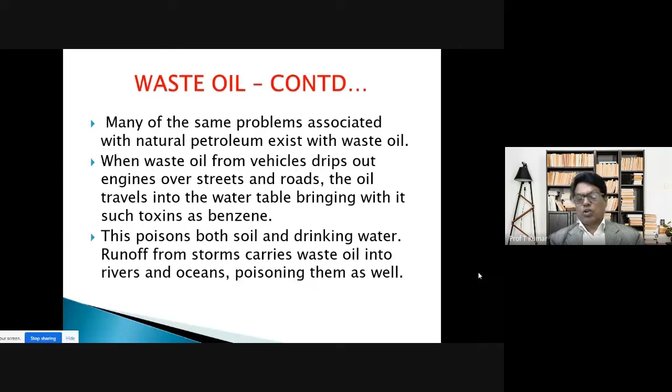So waste oil can be disposed of in different ways: sending the used oil off-site, burning used oil as a fuel, or marketing the used oil. You could use it as a fuel, or market the used oil. Marketing the used oil is possible if a consumer has a use for it, selling it as a fuel, or they can retreat and resell it.

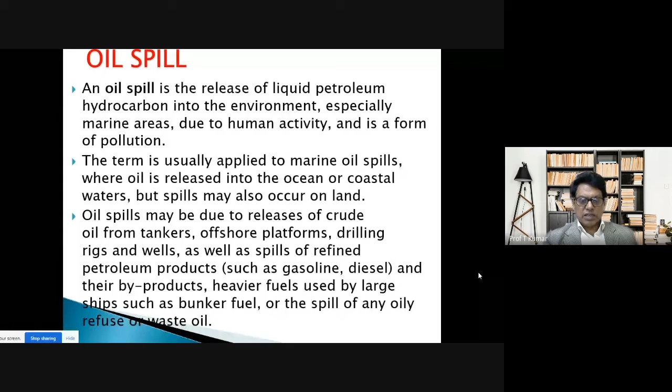Another dimension of oil associated with the petroleum industry is called oil spill, the release of liquid petroleum hydrocarbon into the environment, so some form of pollution. The term is usually applied mostly to marine oil spills, and this may be the release of crude oil from tankers, offshore platforms, drilling rigs, wells, etc. This may have a totally undesirable effect.

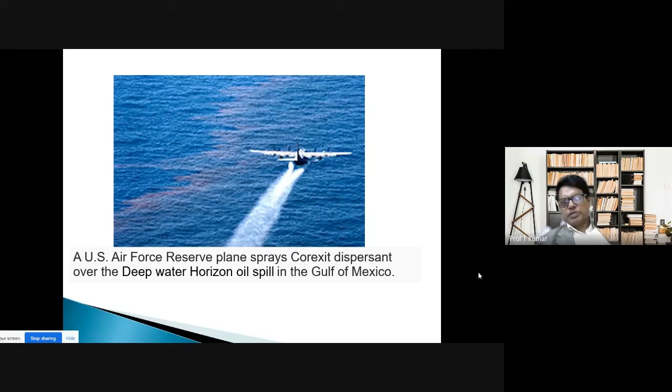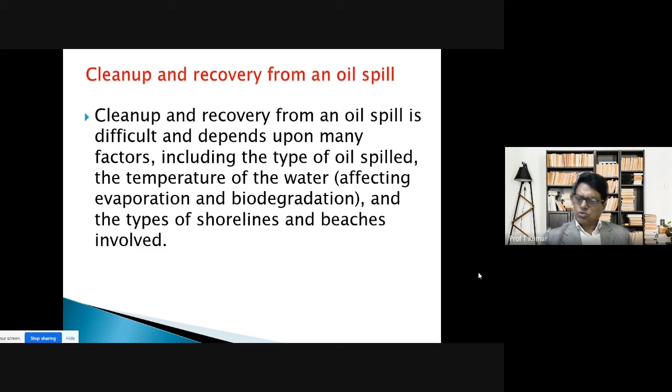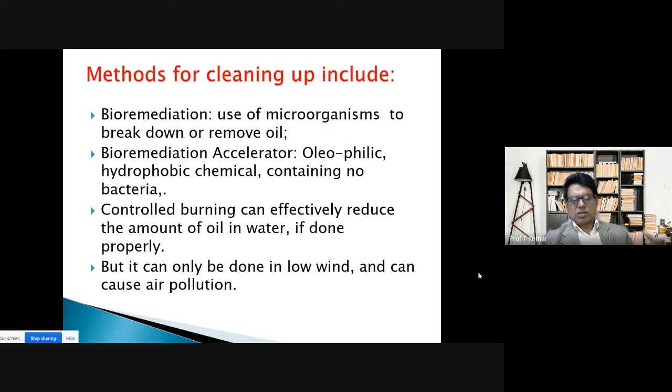So bioremediation is one technique that uses microorganisms, it can break down or remove oil, using oleophilic or hydrophobic chemicals containing no bacteria. Controlled burning can effectively reduce the amount, suppose you cannot collect it, it can be disposed of that way. And dispersants are used sometimes to dissipate oil, so it breaks down. Dredging is used to collect it. Skimming is also used. Solidifying is another technique.

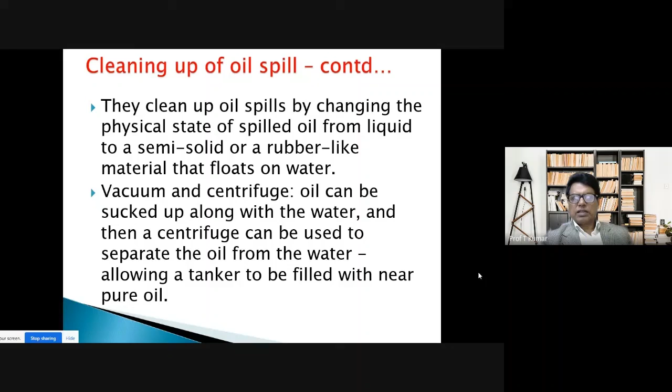Oil spills can be cleaned by changing the physical state of spilled oil from liquid to semi-solid or rubber-like material that floats on water. Vacuum or centrifuge is also sometimes used.

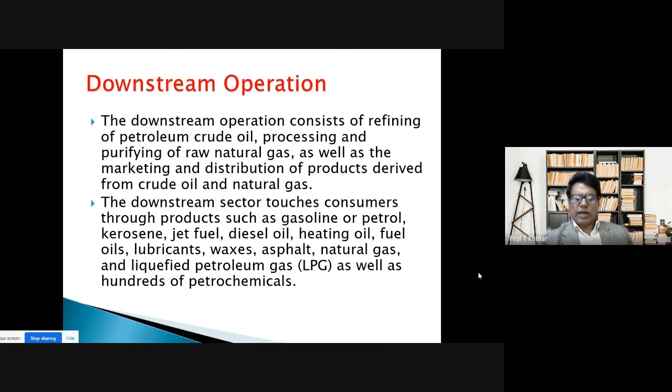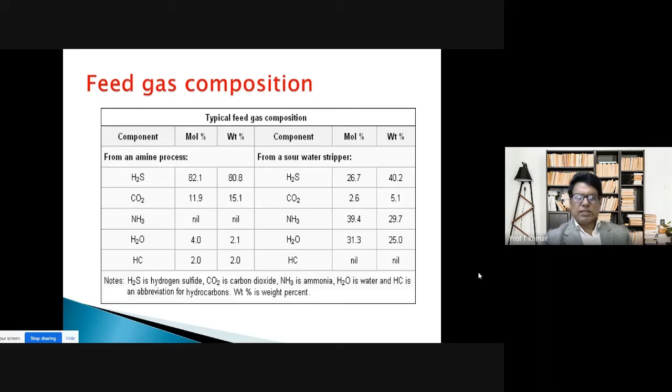Similarly, sulfur could also be produced and can then be a valuable product for marketing. So the feed gas composition diagram shows how feed gas can be consumed in this case, from sour water stripper or from amine process, how H2S has been collected here. This is again a flow chart for the Claus process.

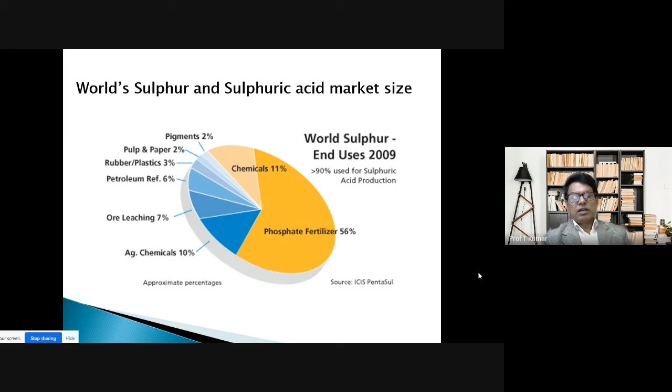I'll skip this diagram—world sulfur and sulfuric acid market. It's not a small market, it's a huge market. Sulfur finds use in medicine; it also finds use in some other downstream products.

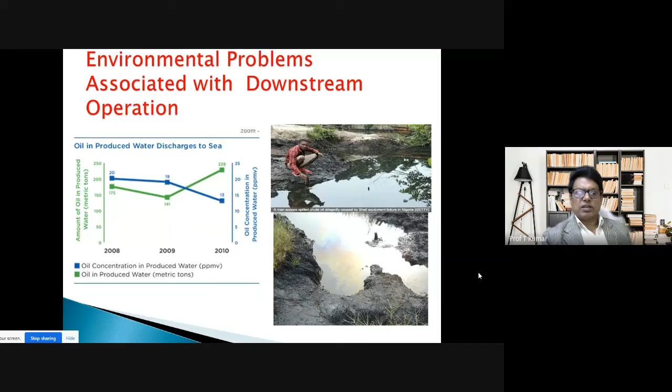So I have come to the end of a brief discussion. Time was quite 2 hours, but we still have some 10-15 minutes for a question session.